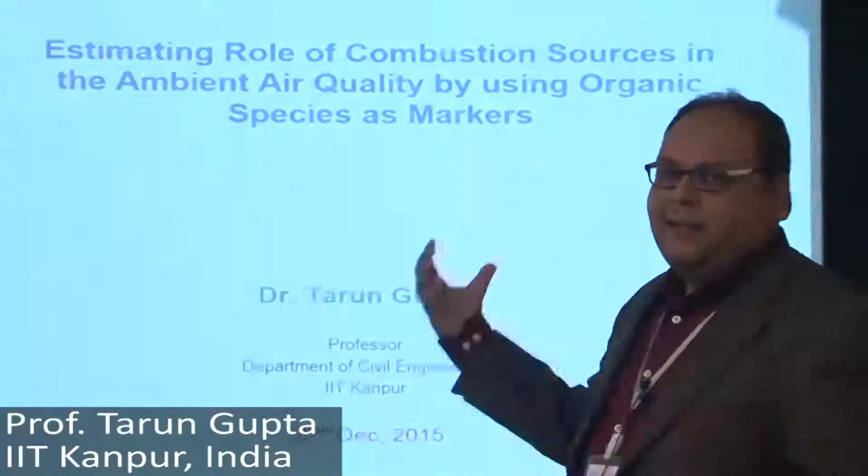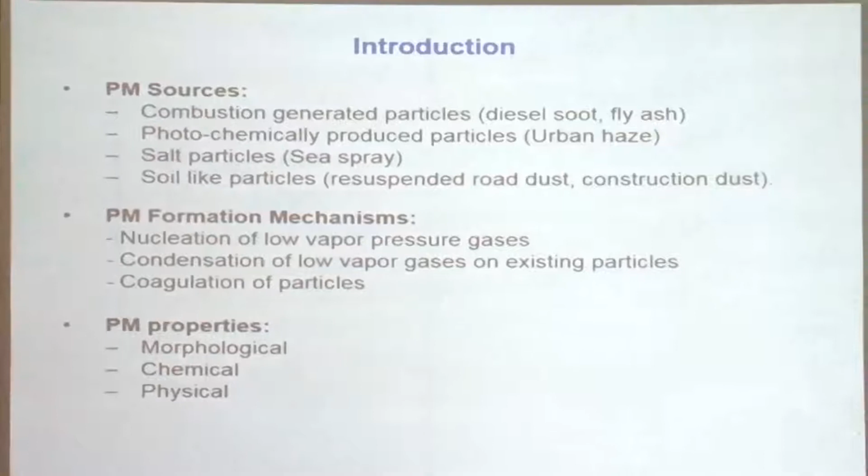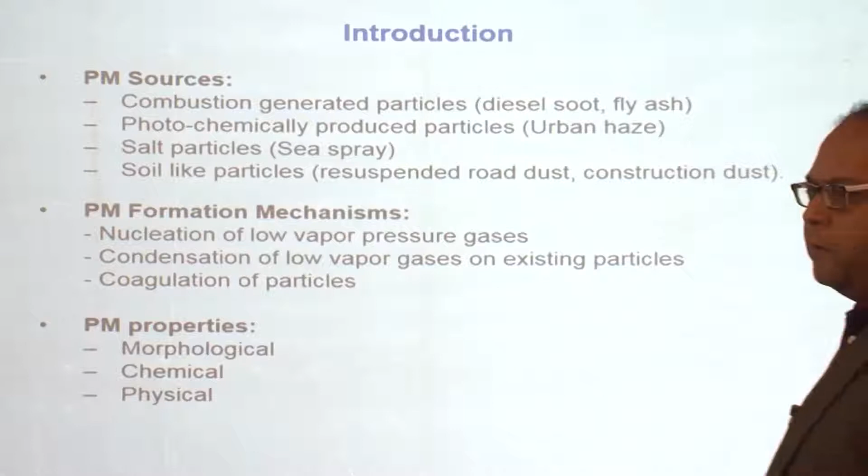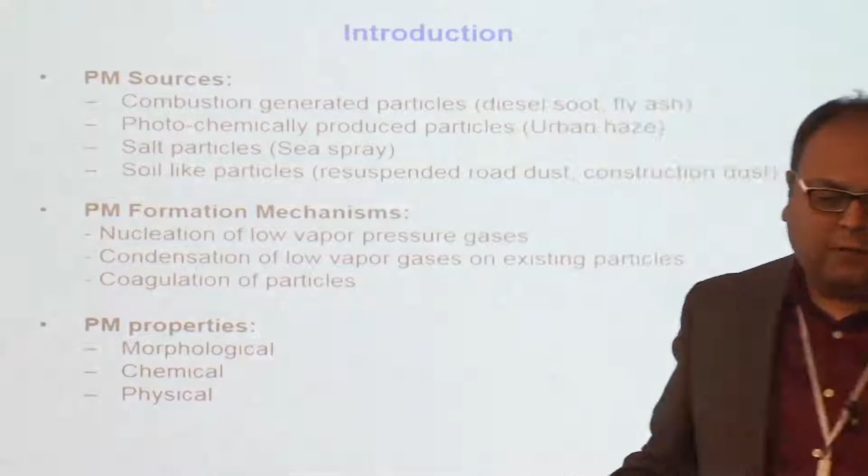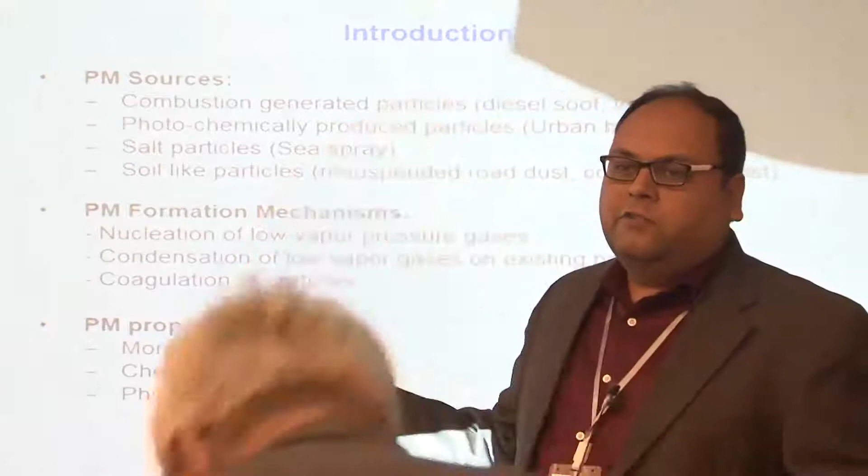Some of the slides are very primitive, but nevertheless it's required. So particulate matter, just to give a brief, can come from a variety of sources, and there are a variety of mechanisms by which they are forming. As a thumb rule, big particles come from mechanical shear, breaking down of road dust, or big machining processes, construction processes. Smaller particles, which are more dangerous and reach deeper parts of our lungs, are mostly combustion generated, or formed as gas to particle conversion due to photochemical or other complex chemical reactions. So that is what we need to remember.

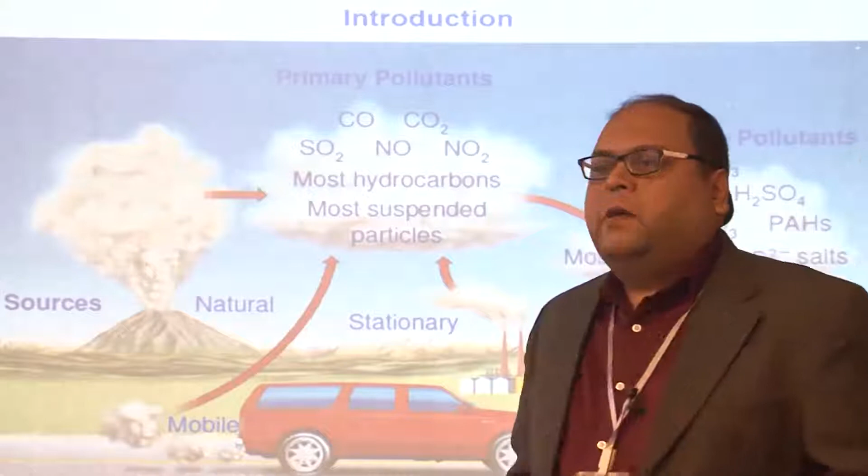This picture itself shows that different kinds of sources are there. Some of them are human-made, some are already there in nature - forest fire, volcanoes. Just to give you a perspective, the amount of sulfate which comes from volcanoes, forest fire, or natural hot springs is actually 70% of the total global sulfate out there. So yes, 30% is coming from anthropogenic emissions, but compared to global natural sources, it's still a minuscule part. But yet we are kind of playing with nature, and there are going to be feedbacks and repercussions of that.

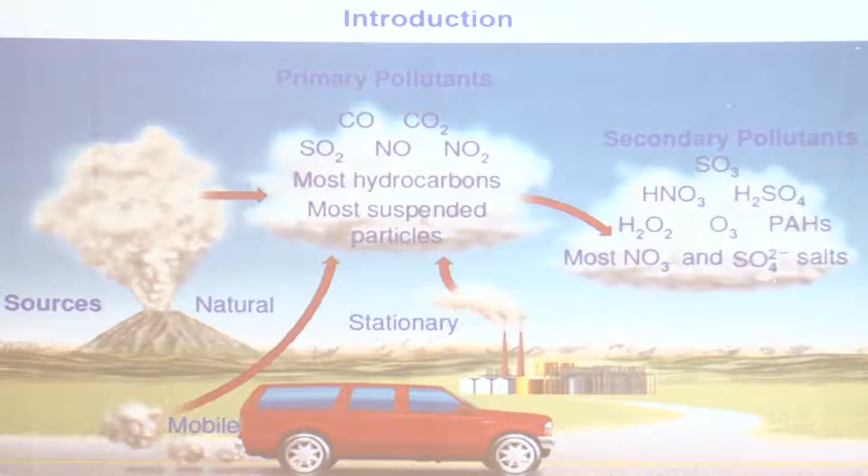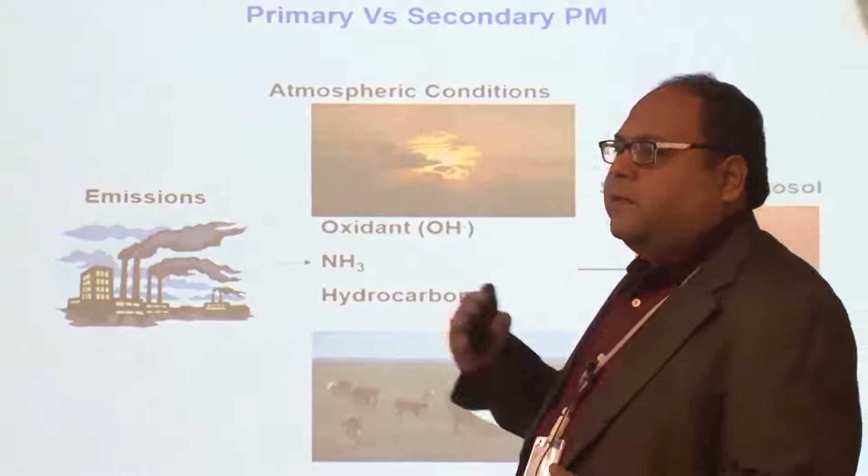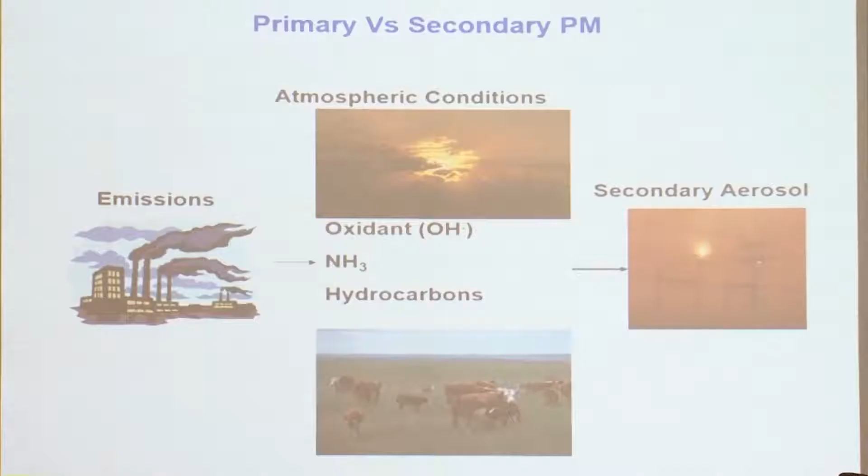In terms of classification of pollutants, what is coming out from the sources can directly affect us, can be directly transported and reach the receptors, or they may undergo transformation depending on the various physical chemical changes they undergo while being transported, or the kind of reactivity these pollutants show when they come in contact with other co-pollutants likely to be in the atmosphere. And that is what causes both climatic effects, aesthetic effects on man-made structures, or most importantly, as Professor Nitin said, the health impacts.

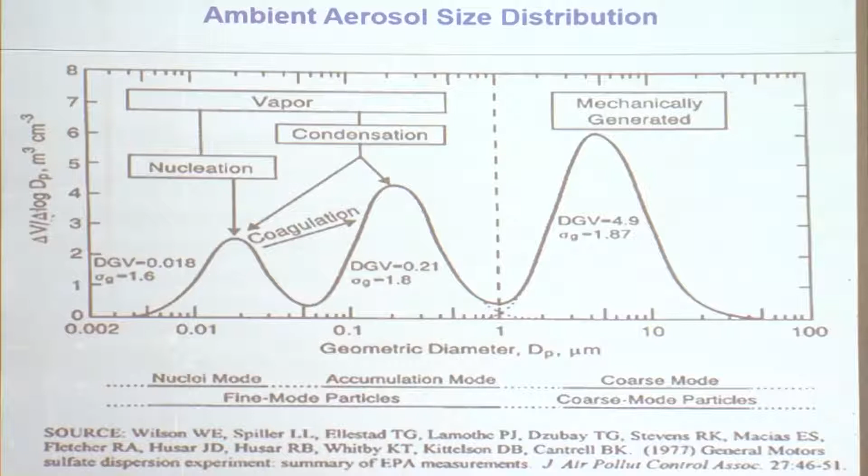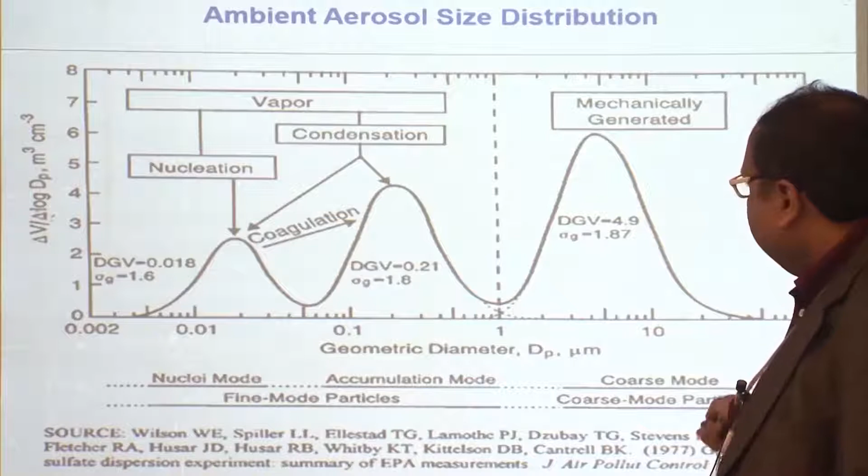This slide I just wanted to show that in a typical urban scenario, you see three modes as far as particle size is concerned. On the x-axis is logarithmic particle size, presenting geometric mean diameter in microns, and on the y-axis you have normalized volume size distribution of particles. Depending on what you put on the y-axis, the relative height of these three modes will change, but pretty much they will not vanish away. As far as combustion emissions are concerned, we are typically worried about particles in two of these modes, because combustion does not contribute in the other mode at all.

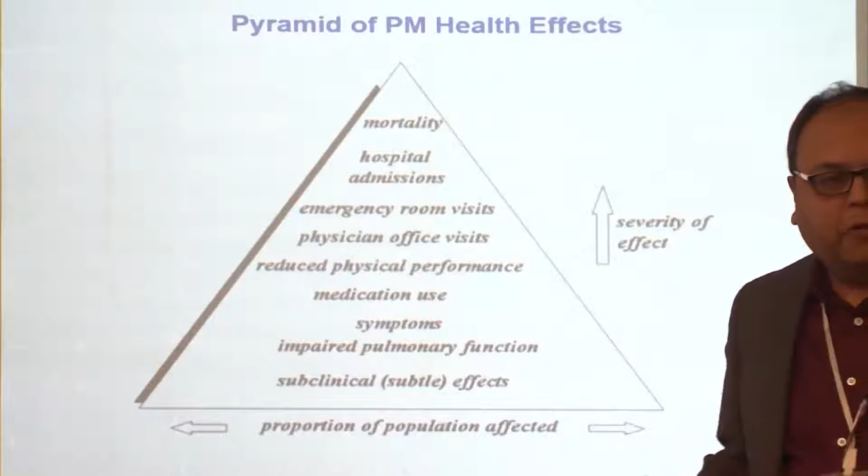As far as health effects are concerned, they can start from mild effects of sneezing, running nose, itchy eyes, rashes on the skin, to more severe ones like restlessness, headache, nausea, vomiting, or difficulty in breathing, or maybe severe cases requiring hospital admission if you are a patient suffering from asthma or COPD, chronic obstructive pulmonary disease. Or if you have been smoking cigarettes for quite some time and left it, air pollution still gives you that kind of kick which the tobacco used to give you. So sorry for that kind of language, but anyway, these things have really been put to the task.

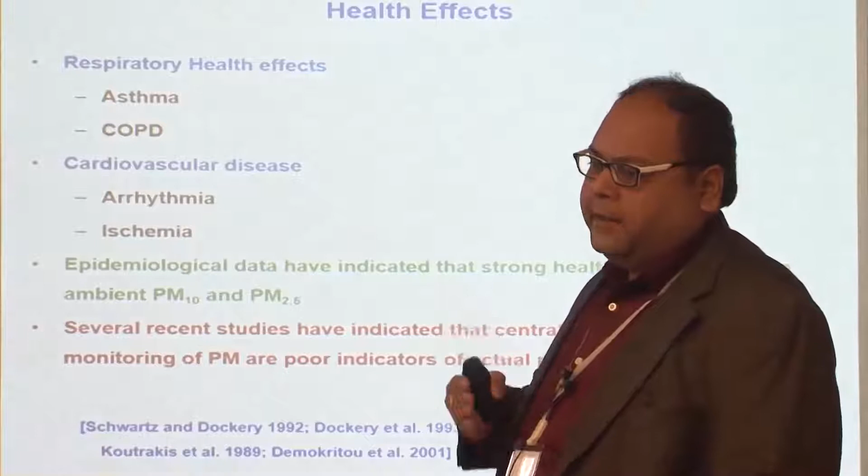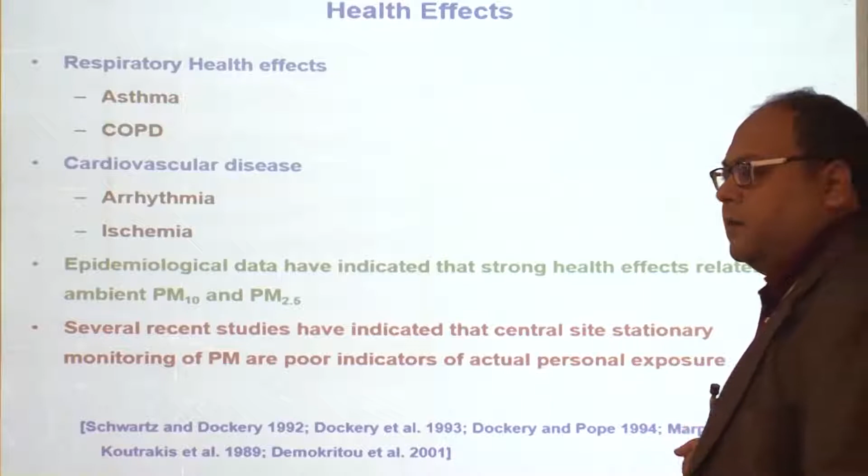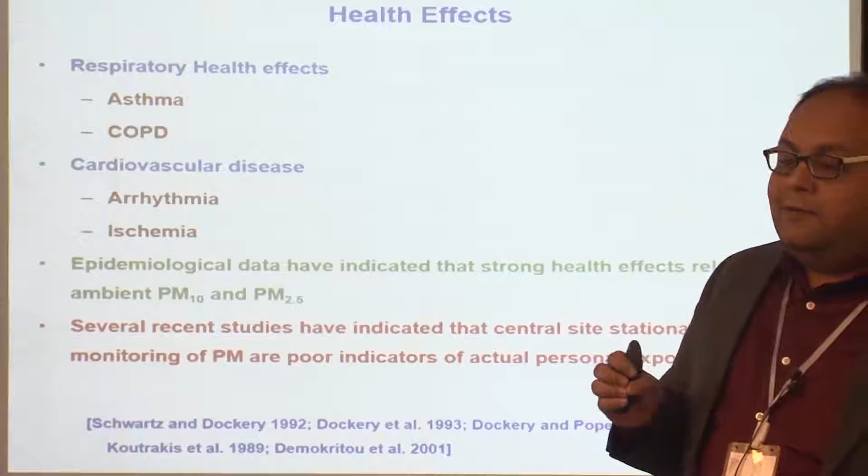There have been more than 500 studies, and even big ones where almost 30,000 patients have been pre and post evaluated for almost a decade. Some of the famous ones were the Harvard Six Cities study, the American Cancer Society study, the nurses study, and so on, where people have really pinpointed that it's not about just your lifestyle, it's not about the kind of medication you are taking, it actually depends on which locality you are living in, because that is responsible for what kind of sources you are being impacted upon.

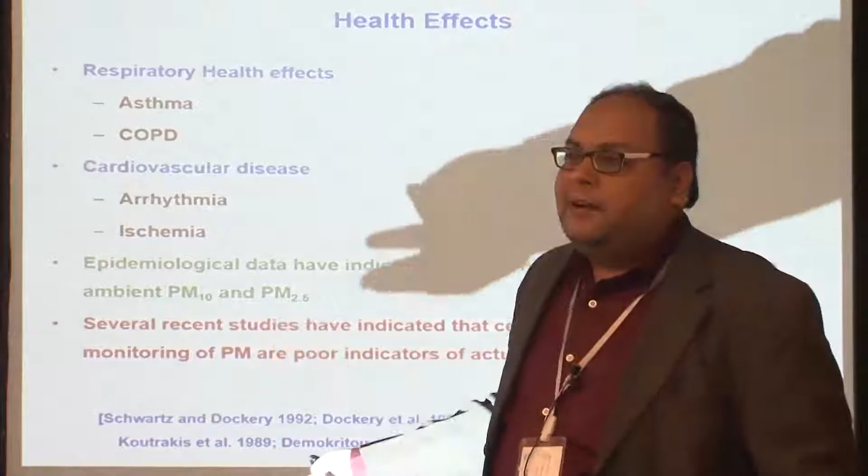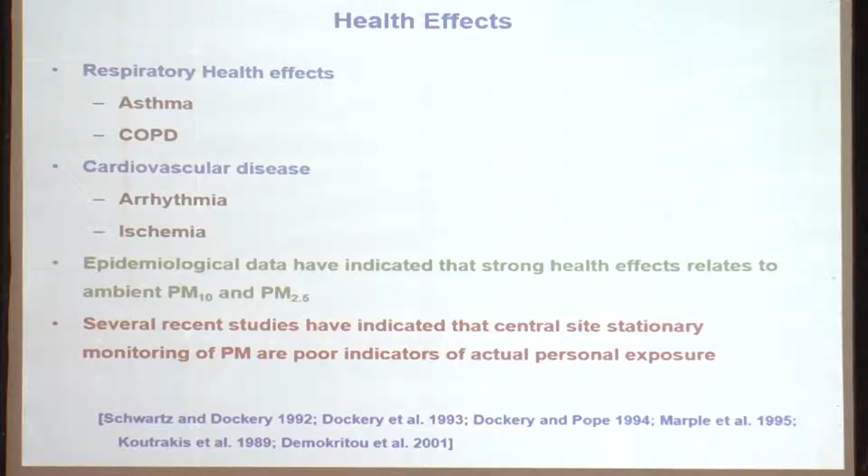There have been cities known to be vulnerable, like Delhi currently is facing that kind of situation, and it's not just media hoax that people are migrating to give a better lifestyle to their children. It's a real truth, because there have been studies which show that a person living in a very polluted city, even if that person is a non-smoker, living in that city per day is like taking on the health effects of 5 to 6 cigarettes or maybe more.

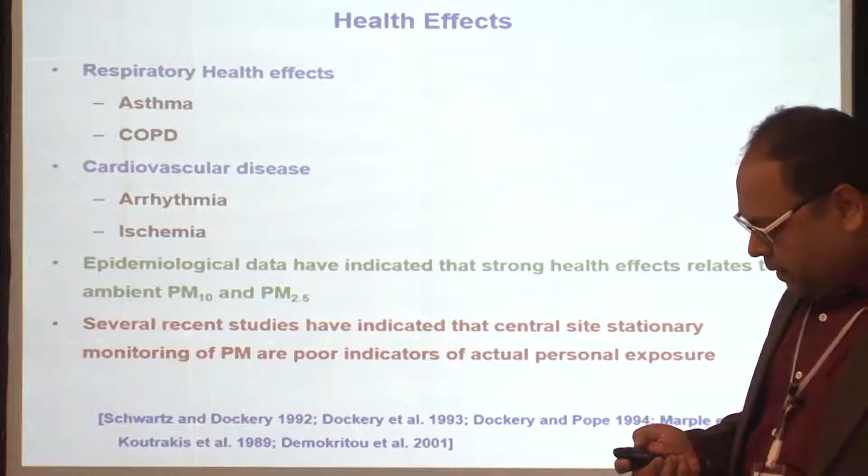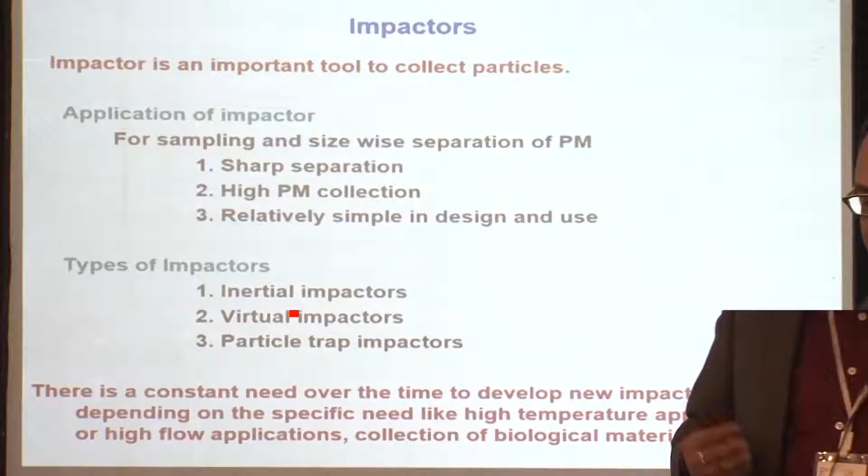The kind of tools which are used can be automatic, real-time instruments, but as far as the classical way of looking at it, and more reliable, is if you have more control over it, we go for impactors. Impactors have been there for more than 100 years now, and they are beautiful mechanical devices which work on Newton's principles of inertia.

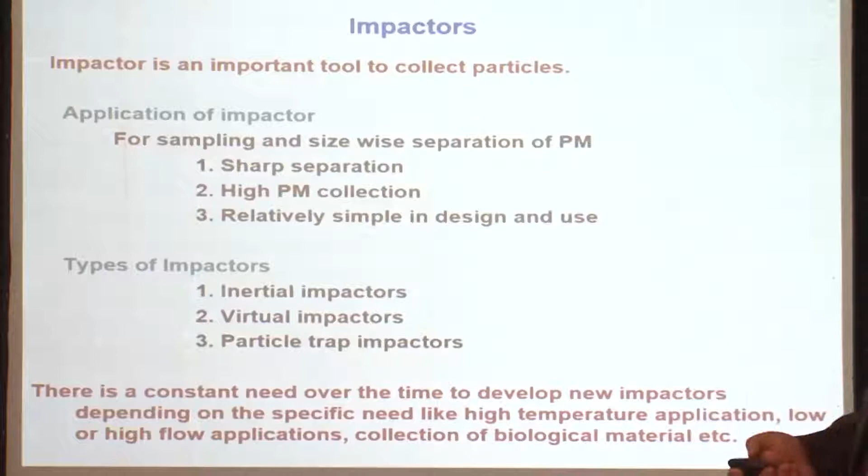Basically, as a snapshot, I am showing the cross-section of an impaction nozzle. What happens is the aerosol jet, or air containing particles suspended in it, is forced to exit through a conical jet, and you put an obstruction right in front of it such that the jet stream has to make a very sharp bend at 90 degrees.

So particles which are small enough, the green ones, are able to bend along with the bending air streamlines, and they pass the obstruction and do not get collected. Particles which are big enough, which have high inertia, go straight and get collected on this kind of substrate, which we call the impaction substrate. This is how you collect these particles, size segregated.

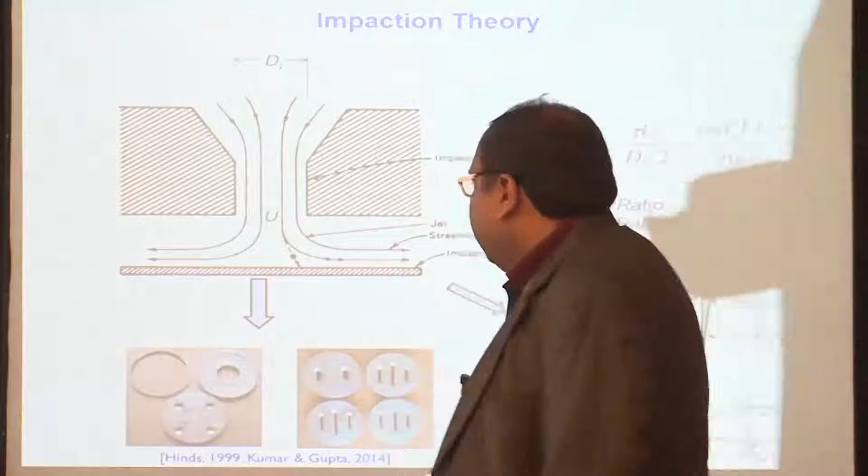If you have a cascade of these stages, one after another, you make a cascade impactor. That means, size specifically, you are collecting particles of different sizes, and then you can subject them to whatever analysis you want. If you want to do toxicological analysis, size-based, you can do that. If you want to do chemical analysis, that can also be done.

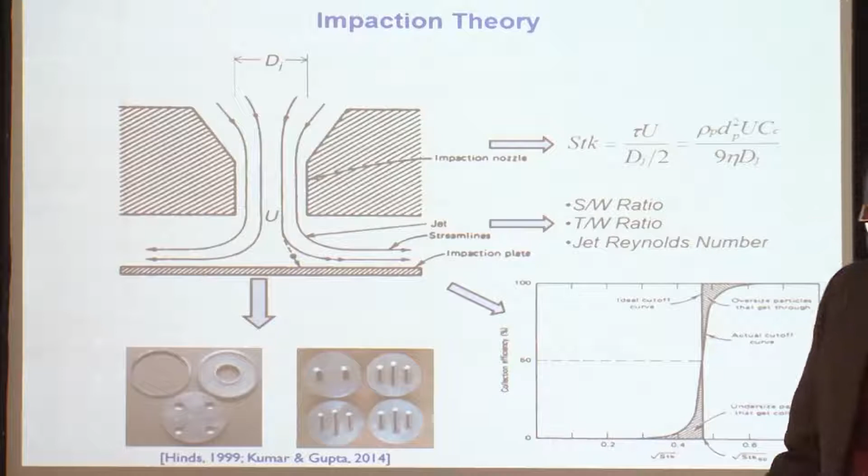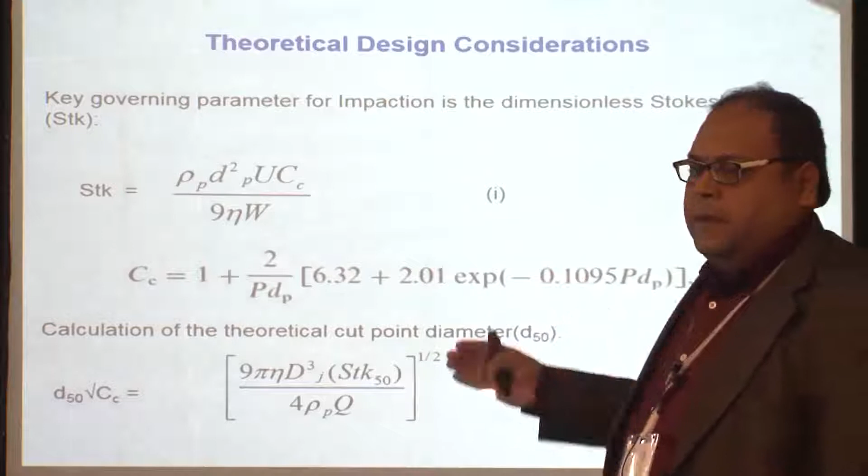These are some pictures of the impactor, and I'll skip the mathematical details, which basically come from the Navier-Stokes equation. Some simplified versions of that, and we look at Reynolds number, Stokes number, which typically determine what size of particles are likely to get collected and what are going to escape the flow regime and come into the calm section and get impacted on the substrate.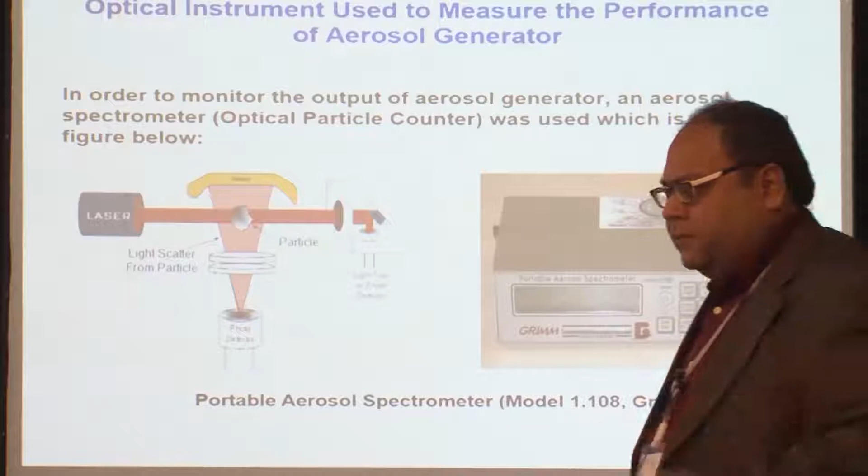This was the device we initially used, an optical particle counter. It's a laser scattering based device where you have a source of laser. As the particle passes through the optical window zone, it scatters the light in all directions, and this particular device senses the scattering at a 90-degree angle, because that is the most sensitive one, rather than back and forward scattering. This device has to be calibrated with particles or dust of known size, shape, and known refractive index, and then it can be used for particles of other sizes.

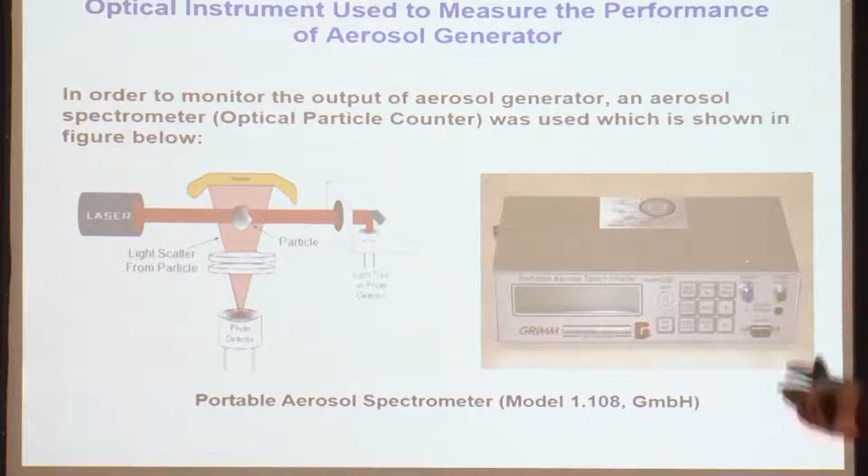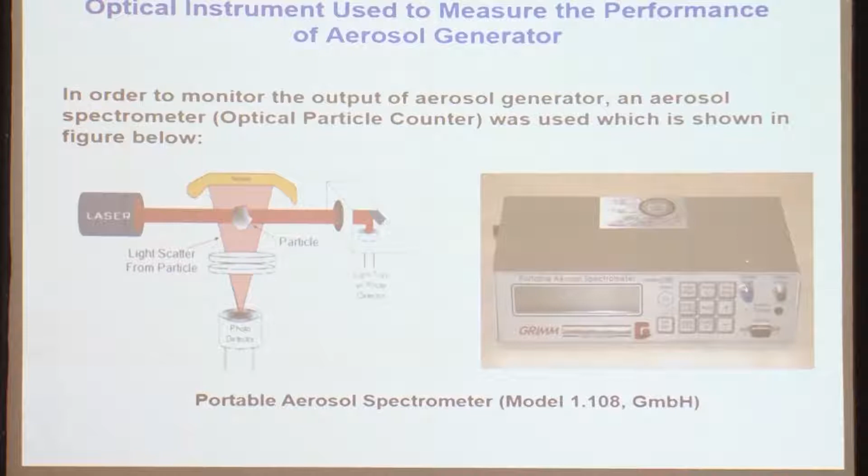I think there are more than 200 such devices in the country right now, which are typically used for ambient purposes, but very rarely calibrated. So that is the bad point, because people are not aware that it should be calibrated quite often.

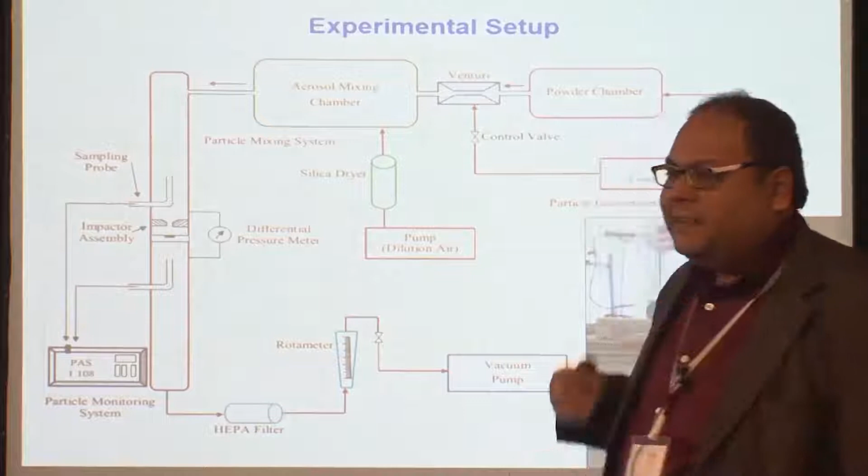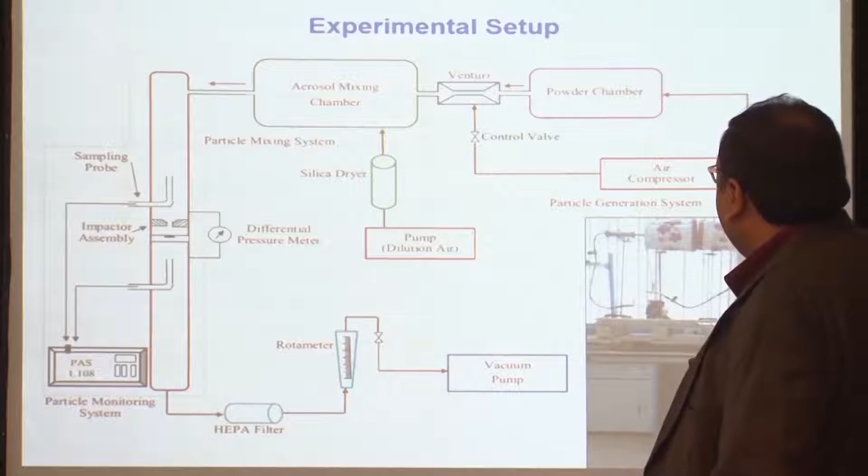What we did was make a testing rig, very similar to industrial filter testing rigs, for testing our impactors, which we designed based on theoretical analysis. So we have a Venturi-based aerosol generator, which Dr. Abhijit Kushari had made for jet engine applications, but we retrofitted it and changed some of the internal dimensions.

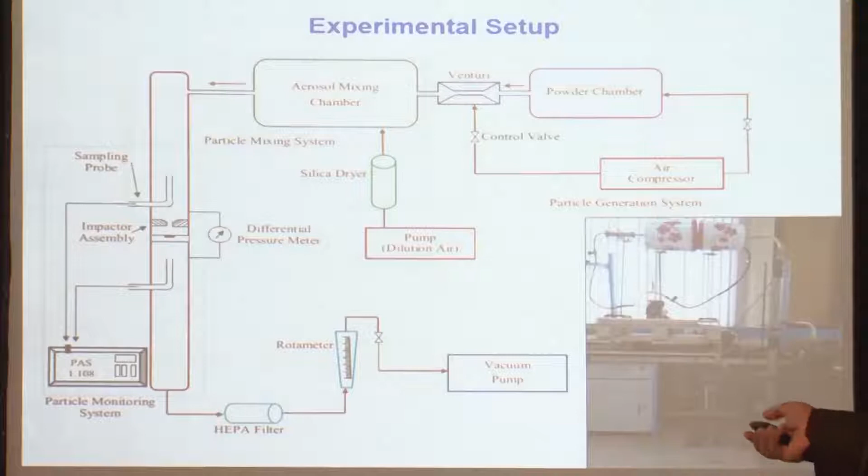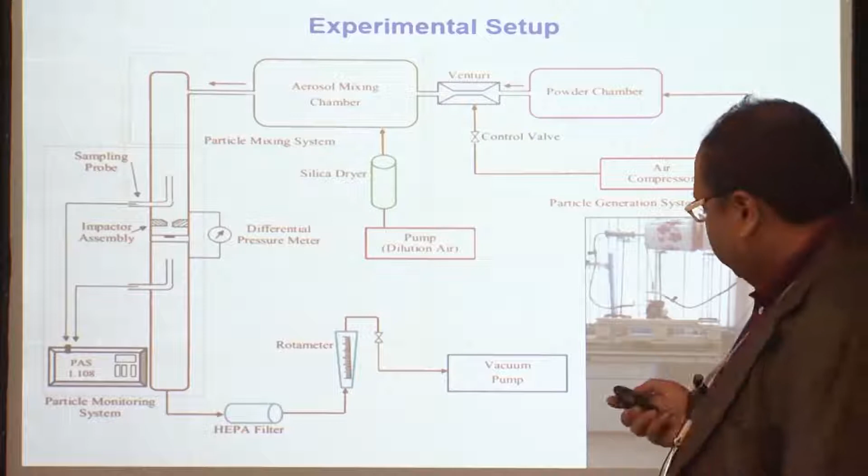This could be used as an excellent powder disperser for low flow rates, which we actually use in the laboratory to generate a stable dust disperser kind of aerosol generator device. This is our aerosol mixing chamber.

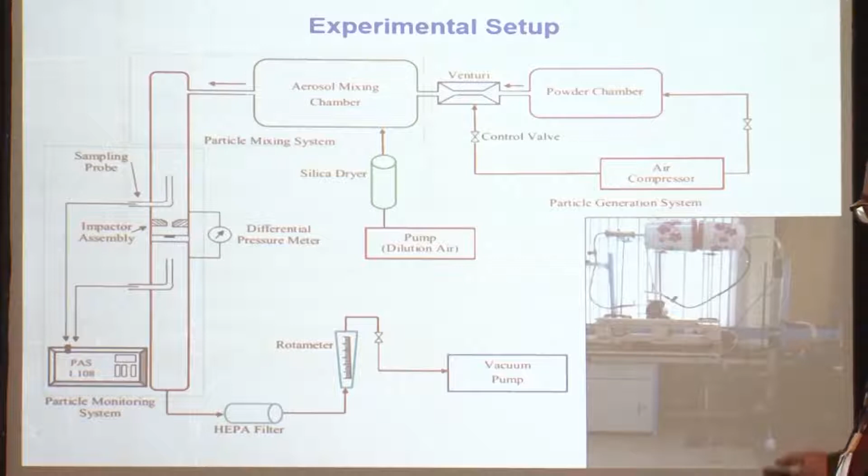Then we have the testing rig with isokinetic probes upstream and downstream of the impactor, and an OPC to measure the particle concentration before the impactor and what comes out after the impactor, to assess its efficiency. This kind of analysis was done several times for different flow rates, different dimensions of the impactor, and different jet-to-plate distances.

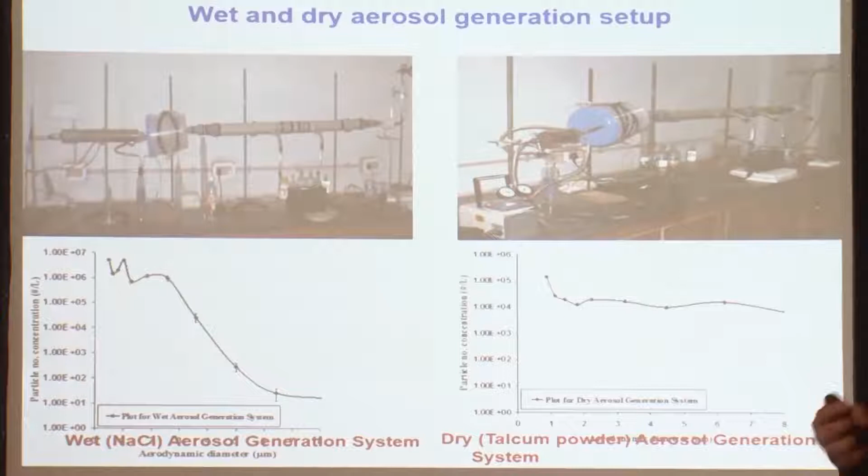I'm showing two setups. Initially we used a liquid nebulizer, which asthmatic patients generally use for inhalation of drugs to open up their lungs and bronchioles. We got this from the market, put it in sodium chloride solution, and generated sodium chloride aerosol from it, and used a silica dryer, basically a denuder system, to take care of extra moisture, so only the dried sodium chloride clusters remained.

This is how the size distribution looked, pretty stable. This is 40 minutes worth of readings, measured every minute, just to make sure we are not misclassifying the effect of change in the size distribution of the generated aerosol with the efficiency of the impactor. So this was a must thing.

But what we really found was when we used a dry aerosol disperser, the retrofitted Venturi kind of dust disperser I just described, we got a pretty stable concentration. So we prefer to use this.

Later on we changed from talcum powder to dolomite, because that's like a spheroid with rhomboid kind of structures and a very stable distribution. So we actually took the raw dolomite, sieved it through several sieves, and finally got everything below 40 microns, and that is what we used as a polydispersed aerosol for testing our system.

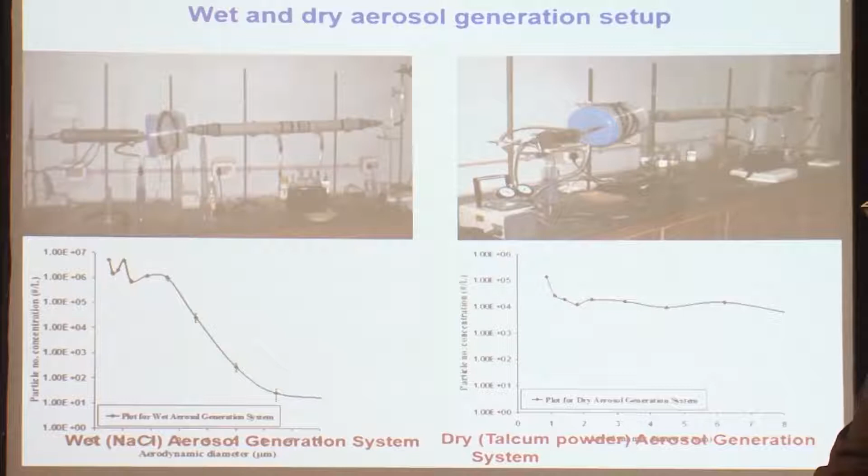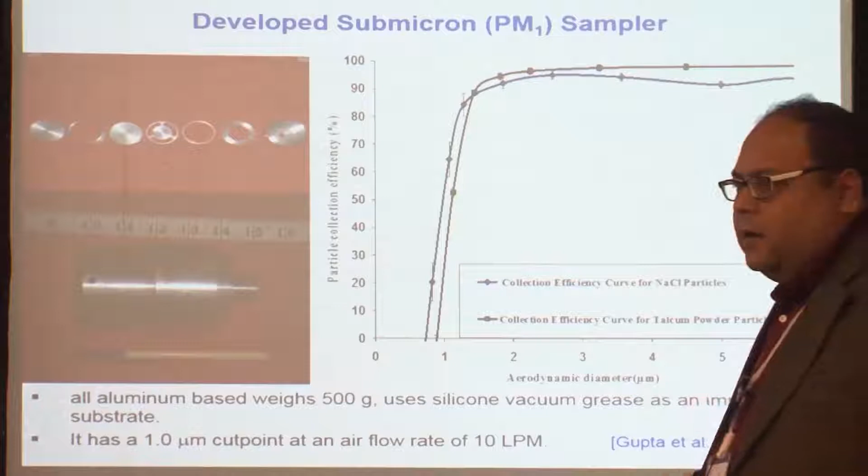The efficiency curve we were able to generate was actually pretty sharp. The cut point was around 1 micron, and we could get collection efficiency above 95% with both dry and wet aerosols. This is how the initial impactor looked. This was way back in 2009.

These are some of the dimensions of the impactor.

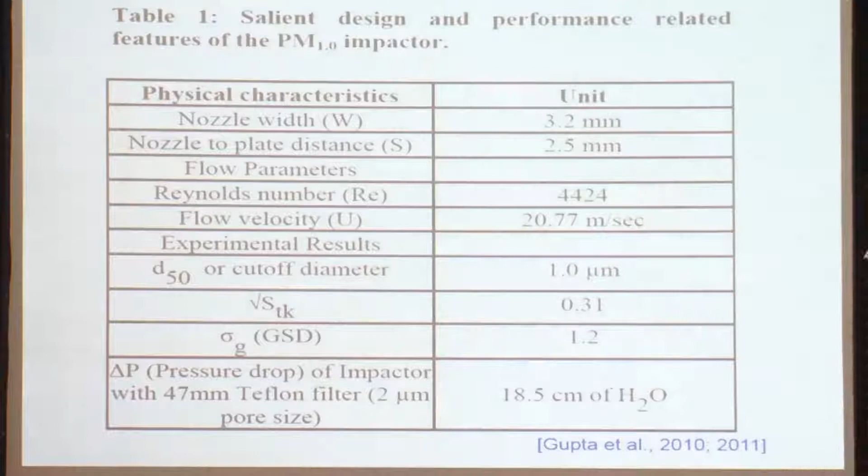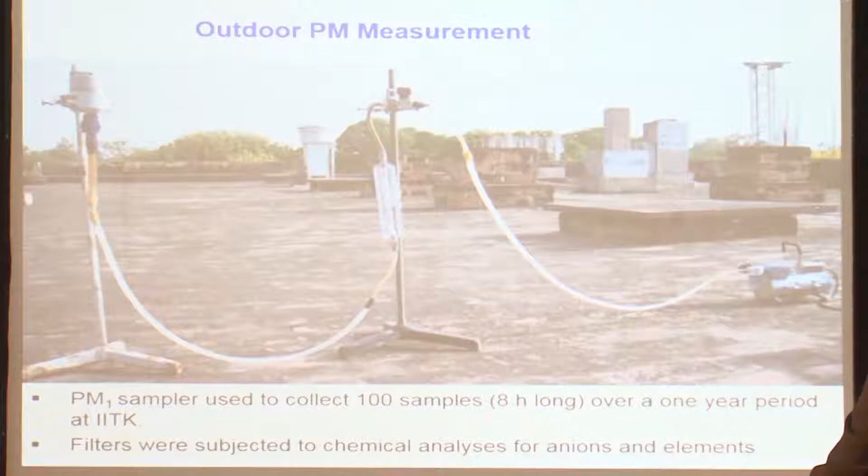Next, we used this sampler on the roof of a building at IIT Kanpur. This was a year-long study, sampling every other day, about 3 days a week, for almost a year to cover all seasons and get not only the mass concentration of submicron particles but also the chemical information.

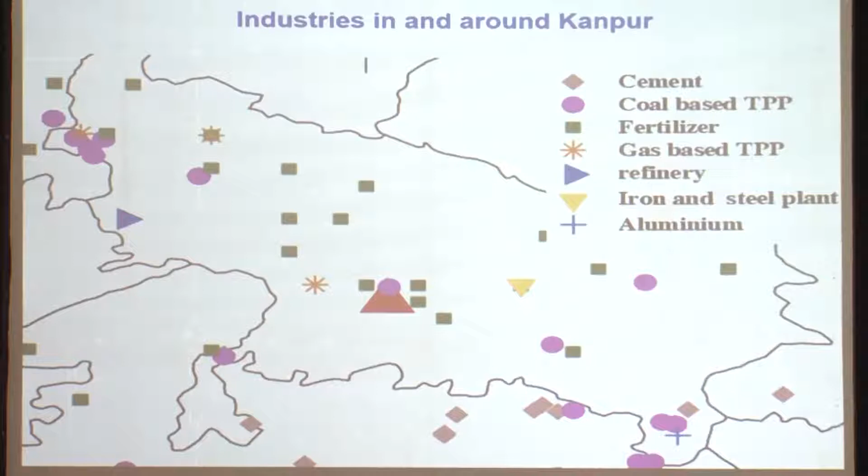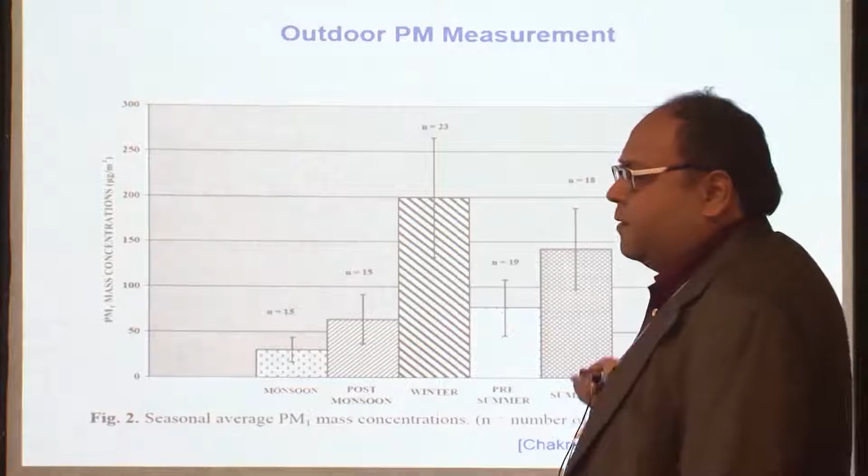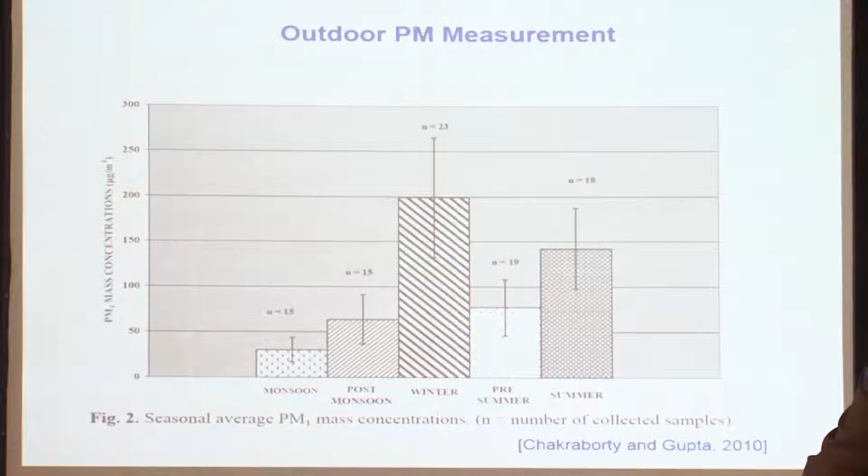When I published these results, some of my contemporaries were shocked to see PM1 levels of the order of 100 micrograms per meter cube, because that kind of concentration was reported by CPCB for PM10, which is an order of magnitude bigger and contributes more to the mass, whereas PM1 is considered to give much lower mass. So people were skeptical about this data, but now I see similar data being produced from Delhi and Kanpur by SAFAR and other central government sponsored programs, and it's pretty routine. This was the real data, actually published about 5 years back.

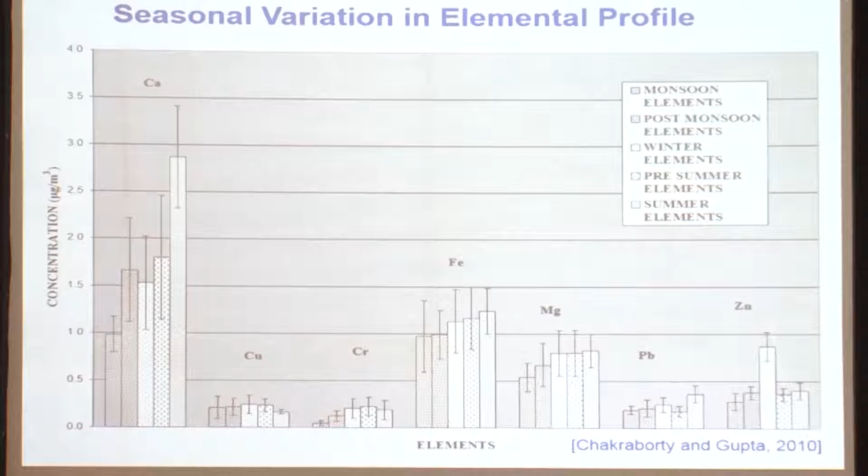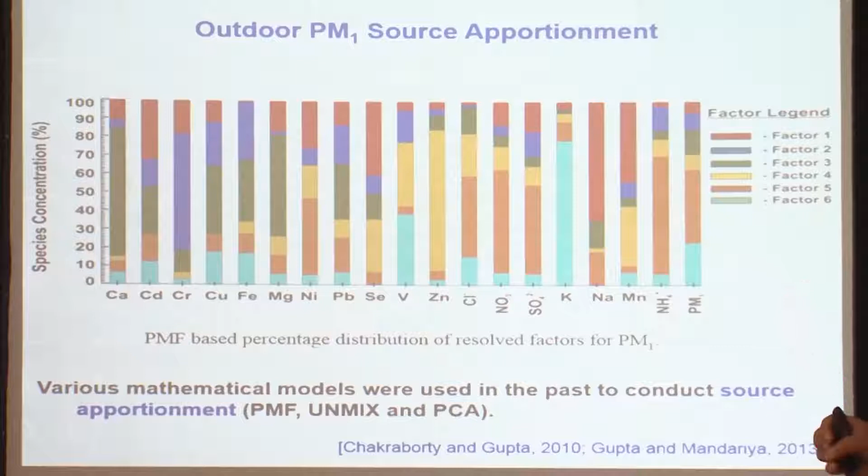We also looked at chemical species analysis. We looked at calcium, copper, chromium, iron, magnesium, lead, and zinc because these metals are markers for specific kinds of sources, and we wanted to tease them out. This is a list of the sources from which these metals could be originating, and using mathematical approaches like principal component analysis and positive matrix factorization, we wanted to apportion the sources from which these metals are coming, so we could find out the percentage contribution of each source.

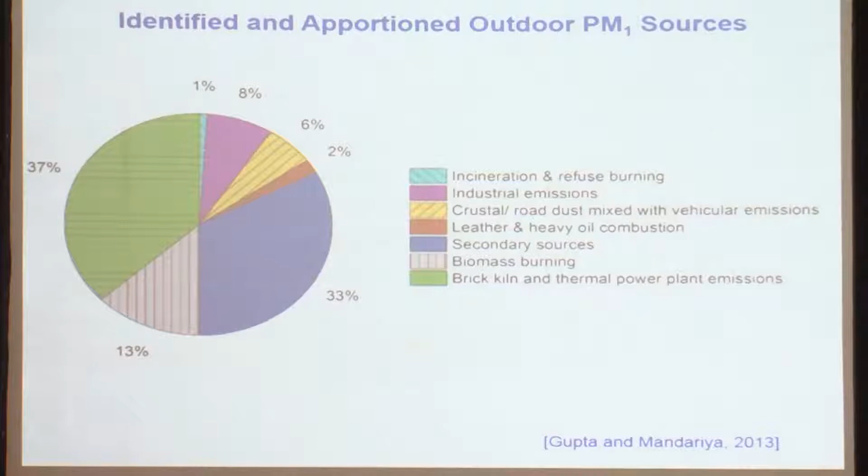That's what is shown in this particular pie chart. This was the conventional technique, using metal tracer analysis to apportion the sources. Now what we've moved forward to is looking at whether organics can serve this purpose or refine our positive matrix factorization or source apportionment techniques.

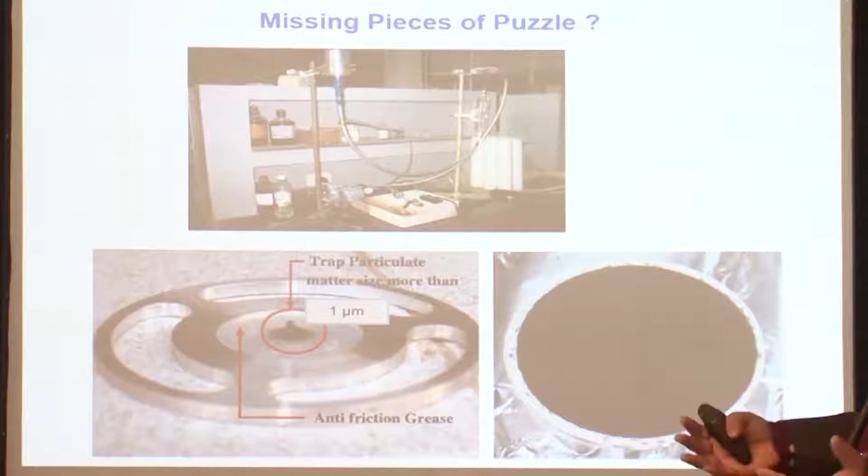If you look at the filter paper, it looks black. This black color is coming from what? Mostly elemental carbon.

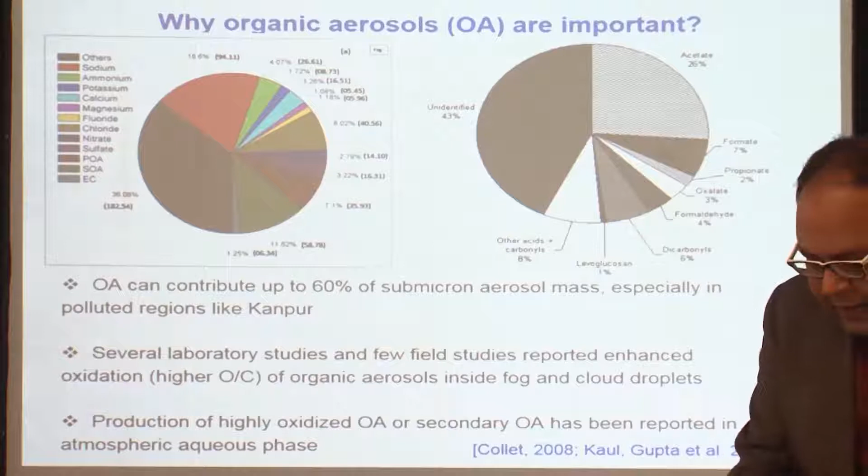Some of the source apportionment or chemical analysis showed that in Kanpur, this is organic carbon, and this is elemental carbon, which is mass-wise lower. But when we looked at the unapportioned part, a huge portion of that is organics, water-soluble organic carbon. About 60% could be organics. So if we're missing that out, we're missing a big thing.

In parallel, we were also looking at fog events affecting this part of the country, regularly monitoring during fog time. We were doing diurnal variations, daytime and nighttime hourly measurements using different kinds of instruments.

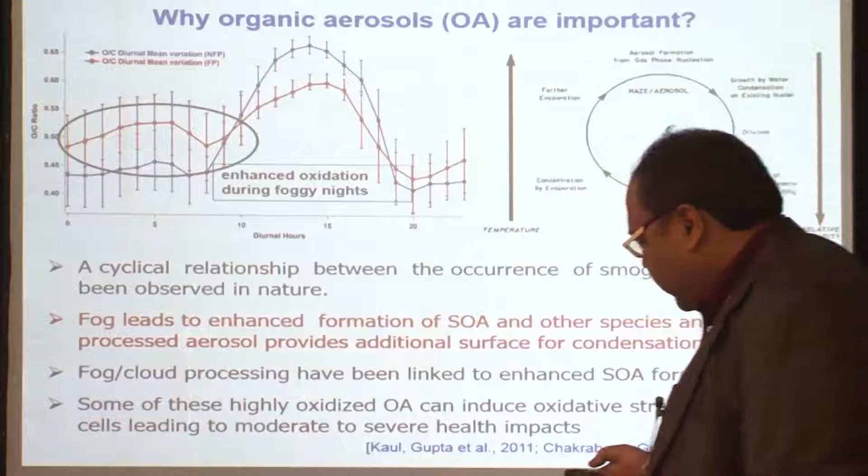One of the latest instruments we have is an aerosol mass spectrometer, which can look at a single particle, do its chemical analysis, and give you the size also. We saw that nighttime enhancement in secondary organic aerosol was happening, which suggested a role for aqueous chemistry.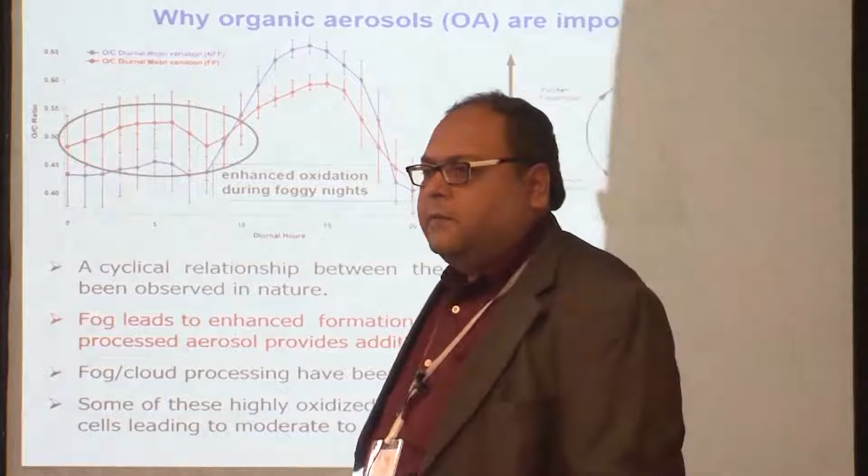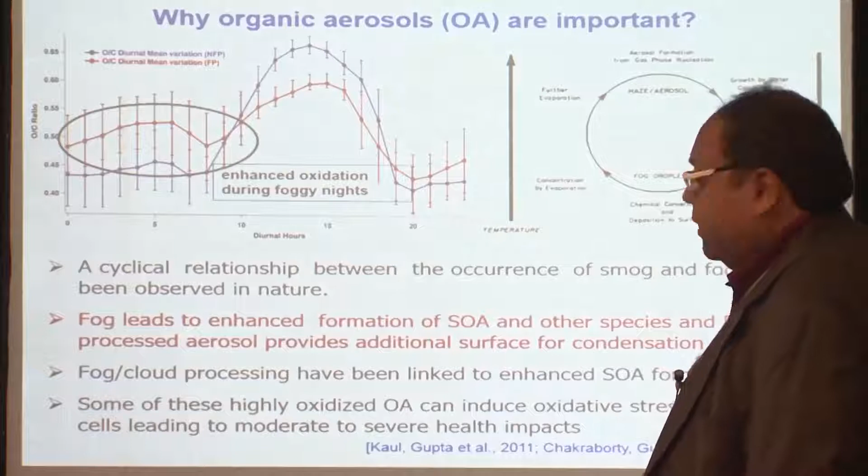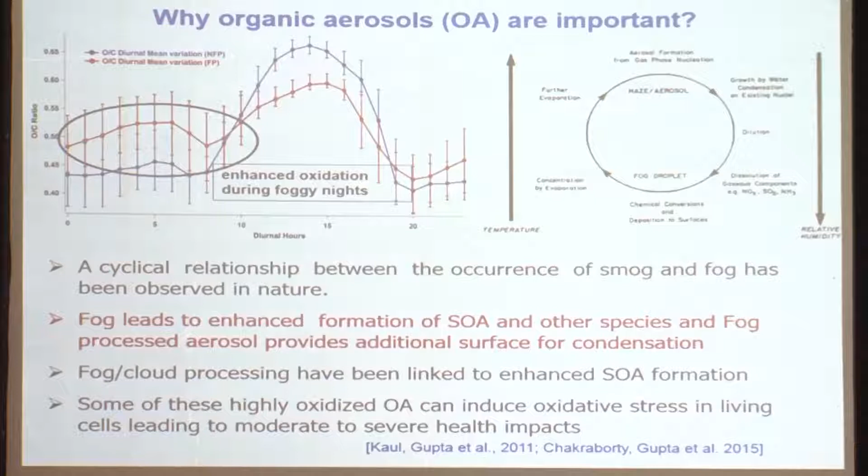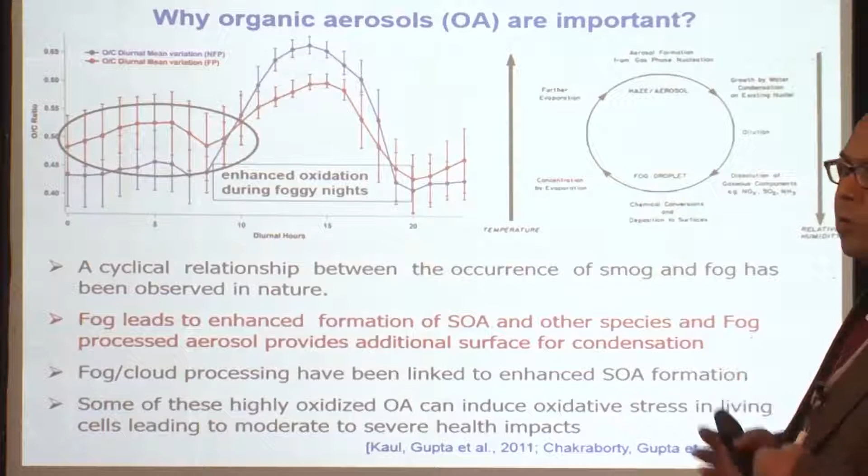That means in the absence of photochemistry, Fenton elements like iron and copper were causing heterogeneous oxidation of various aldehydes and ketones coming from different sources, converting them into organic acids. Ammonia, present in the atmosphere due to huge contributions from animal husbandry and other practices and poor sanitation, is stabilizing these organic acids. Because of this, fog persists for a long duration, since they act as excellent nuclei for hygroscopic growth of fog droplets.

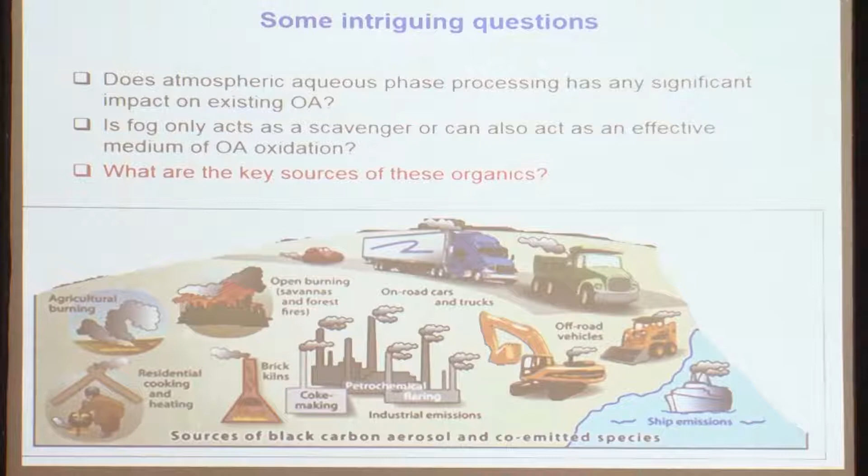So this is another part which emphasizes the role of organics. I've put a cartoon showing where these elemental carbon and organic carbon are coming from.

In continuation of our ambient sampling, we started looking for chemical species. Earlier we looked at metals as tracers; here we looked at polyaromatic hydrocarbons as tracers for different kinds of combustion sources from which organic carbon or elemental carbon is coming. PAHs can be present as pyrolytic material or petrogenic.

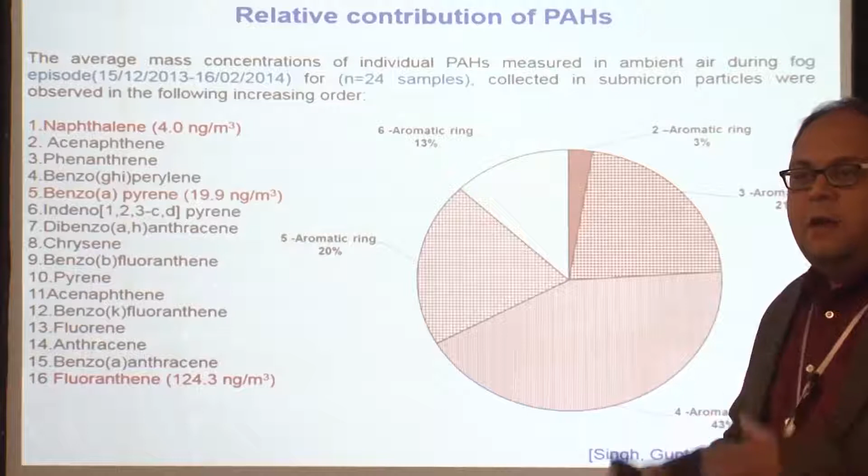That means it can be present in the fuel itself when you are putting it into the car, or it can be generated during the complex combustion reaction which happens inside the combustion chamber. So they could be resulting because of lack of oxygen and pyrolytic reactions happening in the engine.

To pinpoint what is coming before and after, there have been some studies abroad where they looked at PAHs in the fuel and sampled at the emission point. In fact, one of our doctoral students has done that using a device which gives a holistic picture. It doesn't give individual species, but gives a total particle-bound polyaromatic hydrocarbon mass concentration.

But in this particular study, we took help from IIT Delhi, Professor Ghazala Habib's lab, and we did HPLC analysis there to find out what species are present in ambient samples.

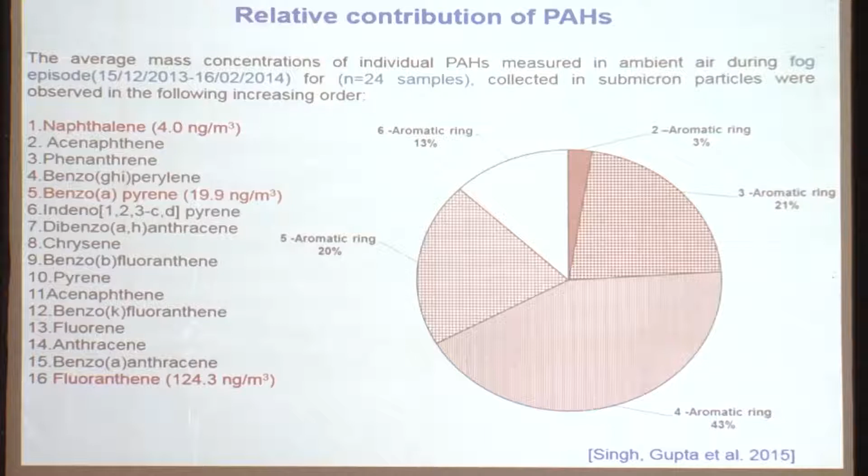We took 24 samples from December 2013 to February 2014. This was the foggy period, and we tried to look at concentration of 16 species in terms of different aromatic rings, number of aromatic rings.

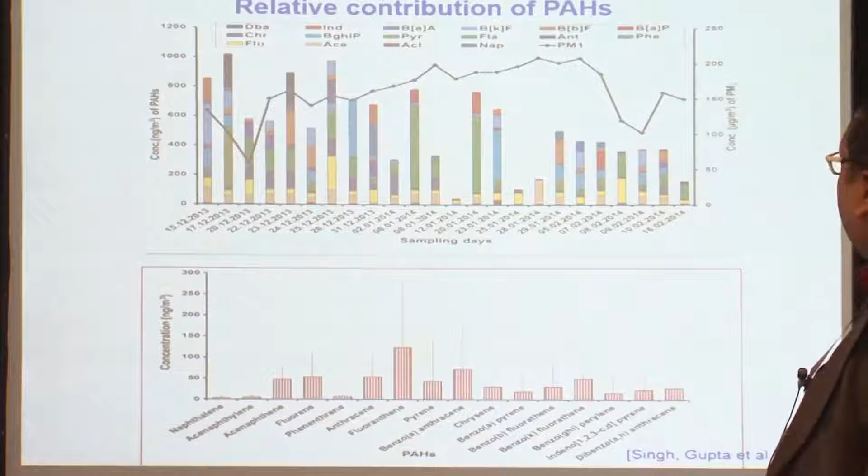This is what the size distribution looks like. Here we have the typical PM1 mass concentration, which is not very different from what I showed earlier. On average, about 120 microgram per meter cube of PM1 mass during the foggy period. On this secondary y-axis, I have the concentration of polyaromatic hydrocarbons in nanograms, and then we have individual components being shown there.

What you can see from the slide is fluoranthene, one of the polyaromatic hydrocarbons, was in excess amount, and from the literature it's mostly coming from diesel emissions. The least one was naphthalene, and there was significant amount of dibenzoanthracene. After benzo[a]pyrene, dibenzoanthracene is considered the second most carcinogenic kind of PAHs. Of course, nitro-PAHs are much more carcinogenic, but we could not detect any of those, so that's good news.

This is my final slide. Earlier I showed that metal signatures can serve as a very good proxy for the sources which might be present there and causing the emissions. Here, using a bunch of published literature and the values we obtained in this particular study, we were able to relate things in terms of ratio of low molecular weight PAHs to high molecular weight PAHs.

Very specifically, for example, fluoranthene versus fluoranthene plus pyrene - the ratio of that tells you if it's coming from vehicular emission, specifically diesel engine, coal, traffic emission, or pyrogenic sources. So it's not only diesel emission, which was of course the most dominant one even during fog time, but also wood and coal combustion and biomass burning.

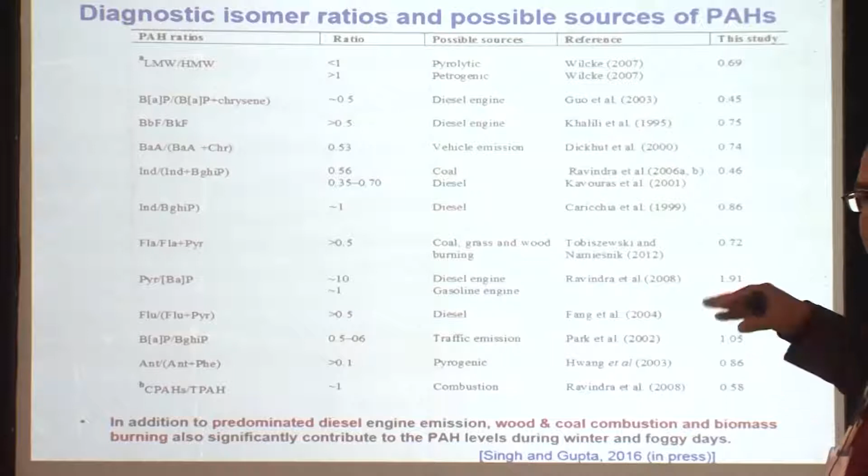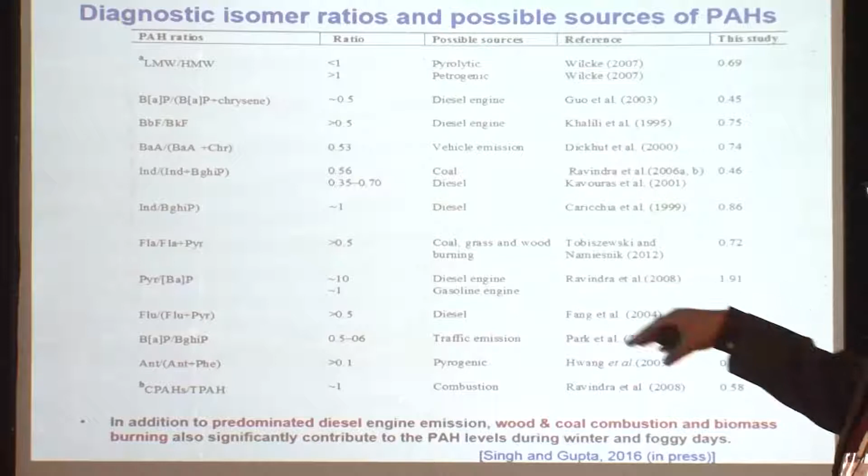Very interestingly, using a real-time instrument, we found an interesting peak in both CO and black carbon coming at 4 o'clock in the morning. Since Kanpur is surrounded by villages, and usually to feed the cattle they start lighting grass and burn some crop residue early in the morning, that signature was very unusually but very accurately captured by some of these instruments.

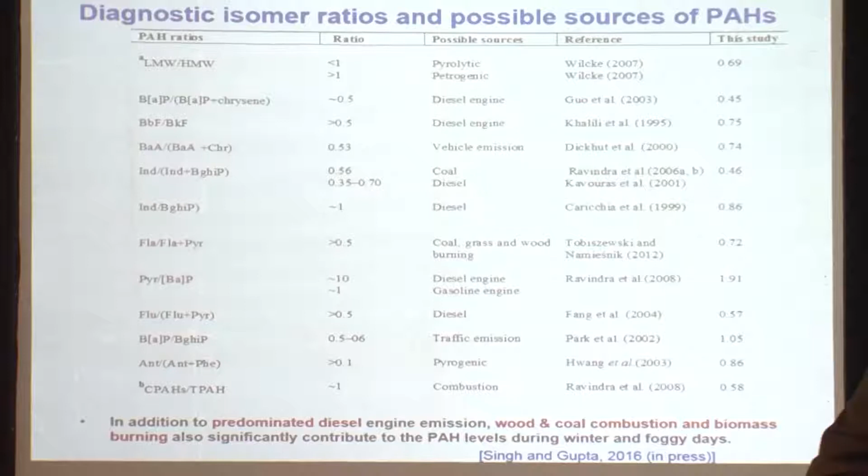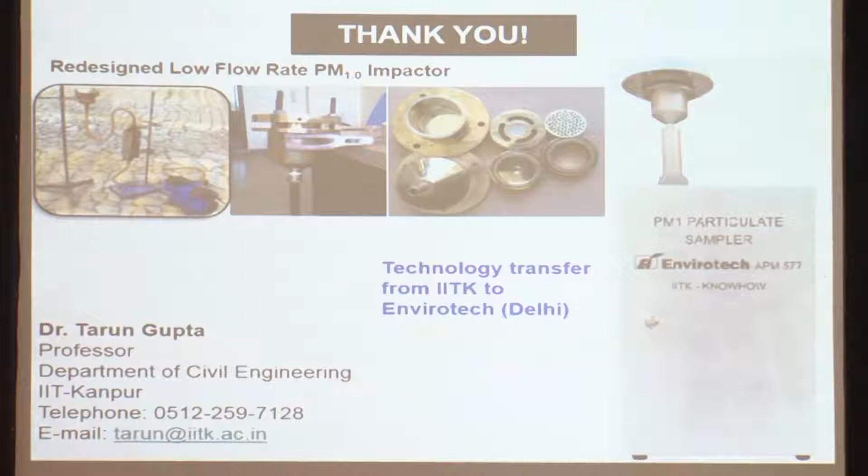I'll stop at this point. The next step is to couple these and refine the PMF models which are based on metal emissions, and refine them with organic signatures to come up with a comprehensive source apportionment technique.

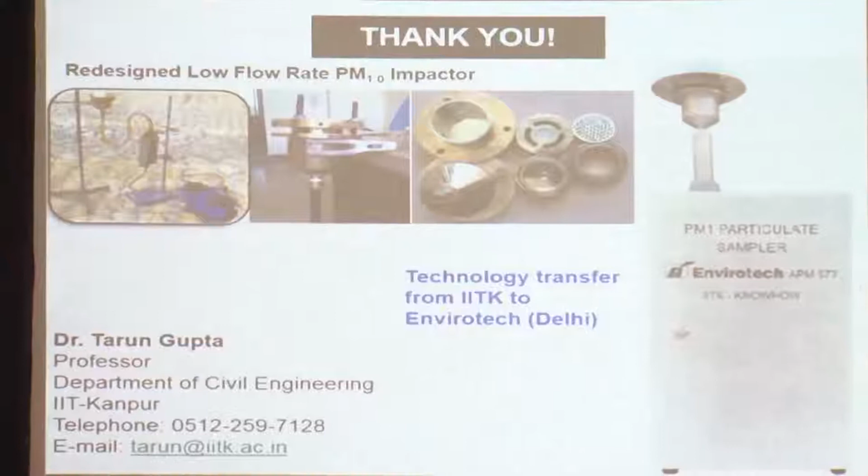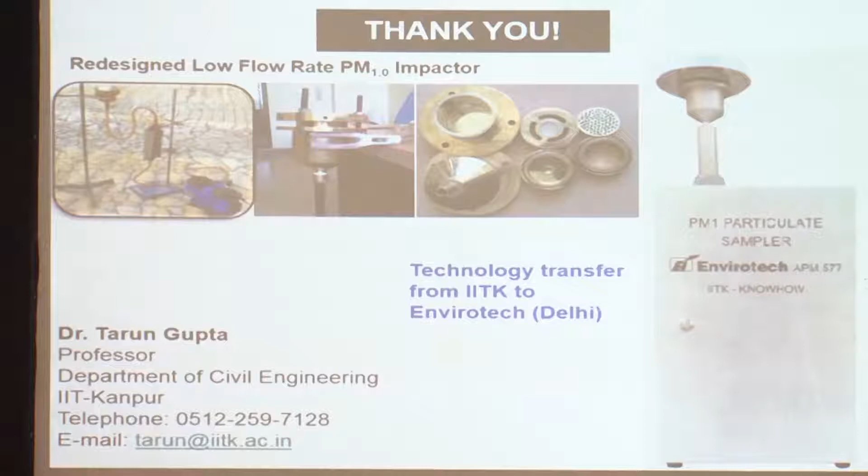We have recently commercialized this sampler which was developed at IIT Kanpur, and now it's available in the market. Envirotech Delhi company is selling this. This is the first of its kind in the country, and the most interesting part is it's only 1 lakh rupees, compared to its foreign contemporaries which are selling it for 16 lakhs minimum. I'll stop at this point. Thank you very much.